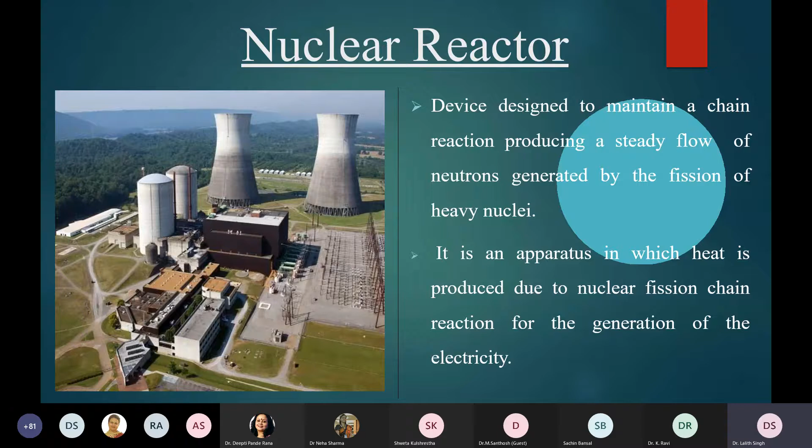And hence our nuclear reactor is designed to maintain this chain reaction so that a steady flow of neutrons can be produced, generated by the fission of heavy nuclei. So in other words, it is an apparatus in which heat is produced due to the nuclear fission chain reaction for the generation of electricity.

Okay. So now let us come to the components of the nuclear reactor, and in this slide we will see what the basic components are and how they work in an integrated fashion for the overall goal of power production. I start with the left hand side of this figure. You are able to see a dome shaped structure, and under this there are some components. There is a rectangular shaped component with round corners, which is known as the reactor core.

In this reactor core the fission reaction takes place, where, as I was saying, so much heat energy gets accumulated, and hence this reactor core has a limitation on what temperature it can sustain. Next, I told you there should be some mechanism to control the population of the neutrons. For this, there are the control rods.

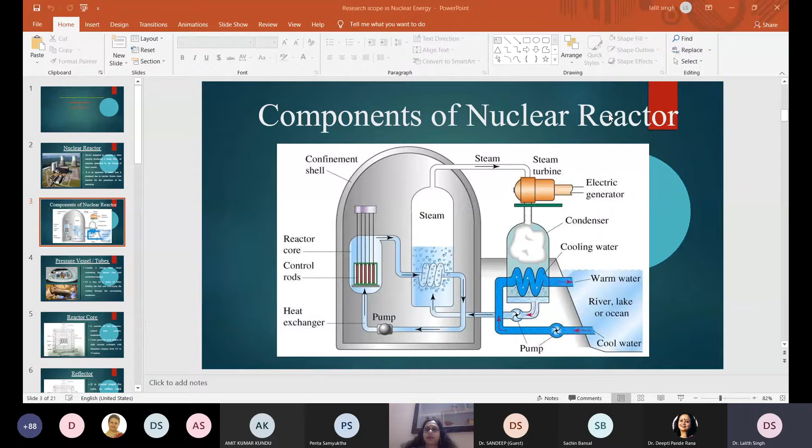I think there might be some technical issue. Yes, sir, you can continue, please. Hello, am I audible? Yes, sir, you can continue, please. Yeah, audible, sir. Somebody might have muted me, I don't know who. Okay, so anyway, I was just talking.

So what happens to this turbine? This steam drives the turbine, but not all the steam can be utilized to drive the turbine. Only the saturated steam is able to drive the turbine, and non-saturated steam comes down to the condenser, which is also shaped like the steam generator, but of lesser height. And in this condenser, what is condensation? When any hot thing touches a cool surface, it suddenly converts into water, the liquid state.

So in the condenser, what happens? The cool water flows in the mechanical pipe which passes through the condenser, and this cool water is taken from the lake or from the sea and pumped into this mechanical pipe. And when this non-saturated steam touches this cool water pipe, it suddenly converts into liquid, and that water can again be pumped into the steam generator, and this way the secondary loop keeps on running throughout the operational period of this reactor.

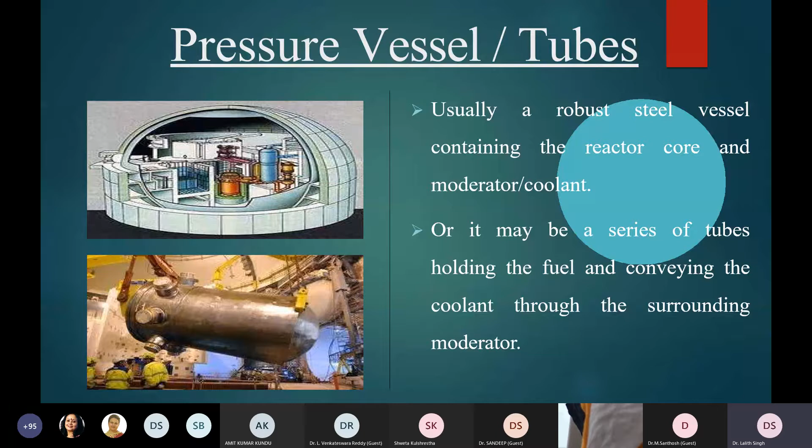As I said, these could also be a series of tubes, where each tube can hold the fuel and convey the coolant through the surrounding moderator, because the moderator is used to thermalize the neutrons. So basically we have to flow the moderator surrounding the fuel where the nuclear reaction is taking place. Now coming to the reactor core, this figure is a close visualization of the reactor core we were discussing.

There are thousands and lakhs of process variables, analog or digital. Analog process variables may include your temperature, flow, or pressure. These are examples of analog variables. Digital variables may include the status of mechanical components, for example valves, heat exchangers and the like.

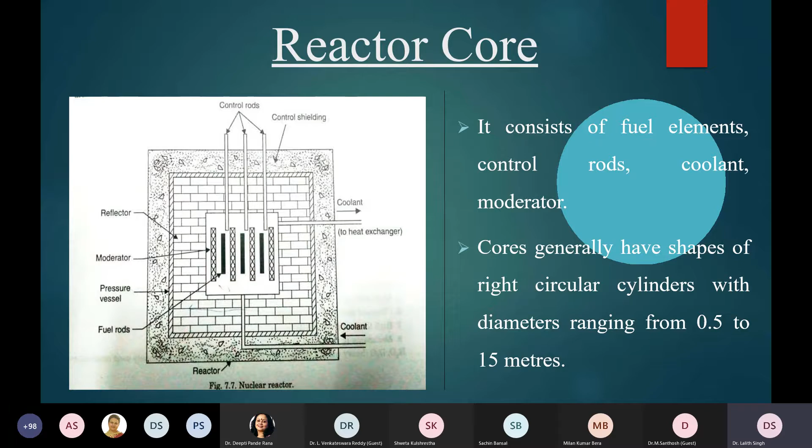So as I said, a reactor core basically consists of fuel elements, control rods, coolant and moderator. And cores generally have the shapes of right circular cylinders with diameter ranging from 0.5 to 15 meters.

Now reflector, we have already talked about what a reflector is. It is basically used to reflect back all the neutrons which were trying to escape from the boundary of the pressure vessel, and it is placed around the core to reflect back all the leaking neutrons. So basically, there's a lot of scope to research on the reflector, what kind of materials can be used as a reflector.

Now coming to the fuel, that's the most basic component of the nuclear reactor.

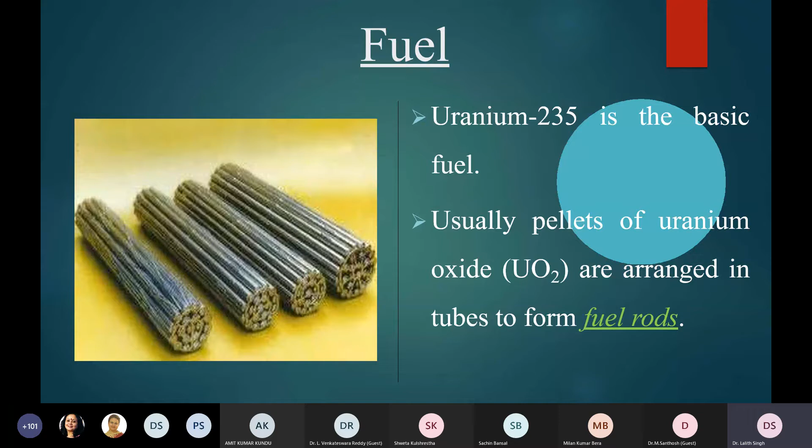So definitely it is a scope of research, because earlier cadmium was used, but it has been seen that cadmium becomes brittle very fast, and hence the life of cadmium is less, for which people started using boron. And in a similar way, it also has many limitations, so we can strive to research to find out some effective material which can be used in the control rod.

So its function is to slow down the rate of the reaction to the controllable limit, otherwise, as I said, the chain reaction blows up like a nuclear bomb. And we can raise or lower the control rods, and it allows operators to control the rate of the nuclear reaction. Although it can be done automatically, depending on the process parameters,

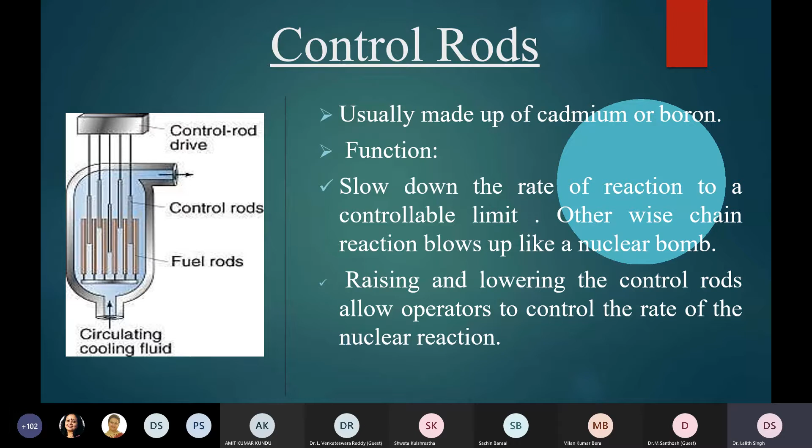the control logics can be simulated, and then as per the control logic, it can be operated by the computer. But definitely there is a facility to override the control logic and drive it manually.

Then coming to the moderator, as I said, moderator is basically to slow down the neutrons from the high velocities.

Sir, Lalit sir, listen. Participants are dropping the message that they are not able to hear you because your voice is very low. Could you please increase your volume? Let me check. It is 100%. Madam, you tell me, are you able to listen to me properly? Sir, it is very low. So should I disconnect and restart? No, no. You speak a little bit louder because your words are not clear. Okay, I'll try. Although I'm speaking very loudly, but still I don't know. You can tell if I stop presenting and I can restart. If it is not audible, then we will decide. Please let me know. Sure, sure, madam.

So coming to the moderator, the function is, as I said, to slow down the neutrons from the high velocities, and hence high energy level which they have on being released from the fission process, so that the probability of the neutron to hit the fuel rods increases.

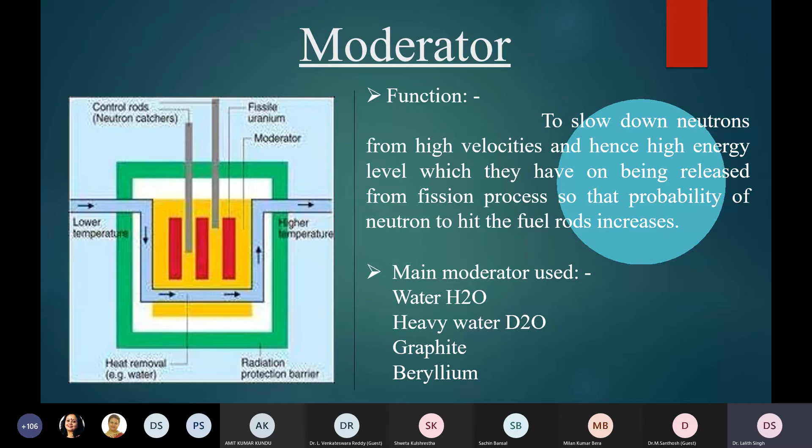Now the coolant, as I told, is used to remove the intense heat produced in the reactor, and that heat can be transferred to water in a separate vessel, which is converted into steam and runs the turbine. And the main coolants that can be used are water, carbon dioxide, mercury, helium.

And yes, this is also a subject of research, how more and more effective coolants can be created or made. So this is the research scope in the area of the coolant.

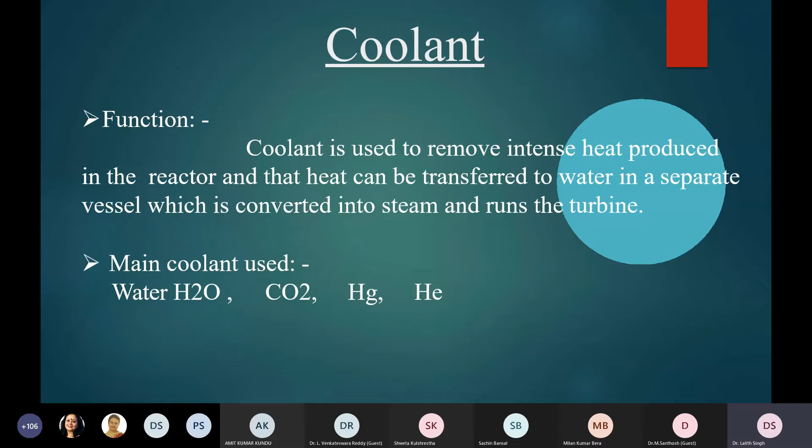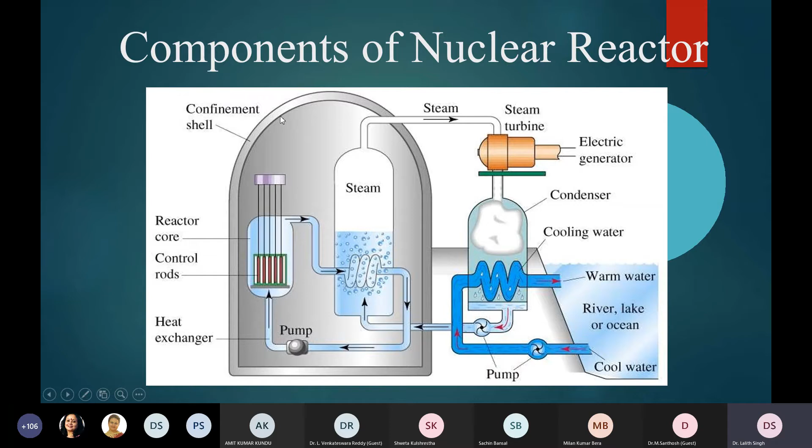Now containment. So containment, as I said, coming back to that first slide, this dome shaped big structure, with the steam generator, reactor core, and pump inside, where the confinement shell is written. Basically, this structure is known as containment, and it requires huge expertise to build the containment.

Because this is the first barrier: if the radioactive release goes out of the containment, it will release to the public. This will be the first interface to the public, and hence it has to be designed to protect it from outside intrusion, and to protect those outside from the effects of radiation in case of any serious malfunctions inside, because inside the components can breach.

For example, there can be leakage into the steam generator, there can be a crack in the pressure vessel, or there can be a loss of coolant accident. And these are the emergency situations which can fail the fuel because of the high temperature, and the fuel can start melting. And that is the reason we have to design the containment so that it can be sustained under all these emergency conditions.

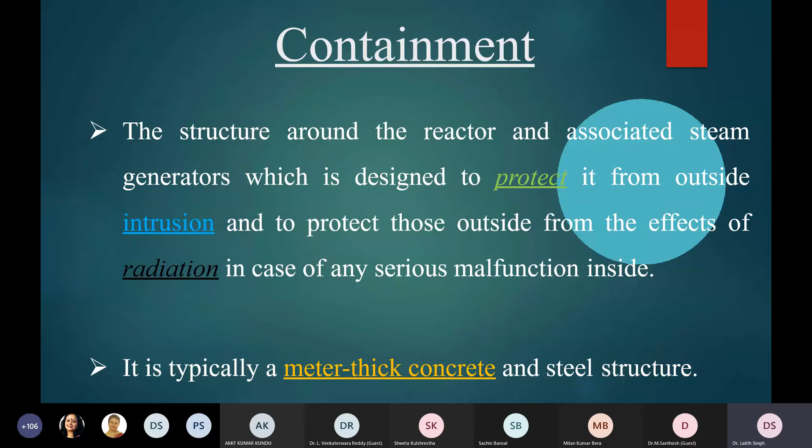And it is typically a 1 meter thick concrete and steel structure. Why steel? Because steel has a good property to reflect the radioactivity, which are the alpha, beta, and gamma radiations. And generally it has two dome shaped structures, one outer and one inner, both almost 1 meter thick, so that if the inner fails, the outer will be able to take it up.

Now let us see some statistics of the nuclear power plants in India. India is planning a huge increase in nuclear power, and it is making nuclear power one of its key policy initiatives, with plans to build 48 new reactors and boost output to 63,000 megawatts by 2032, which is almost a 14 times increase on the current levels. There are existing 20 reactors which are generating almost 4,700 megawatts of electrical energy.

So if you see this India map, the nuclear reactors are in all the parts of India. For example, you can see Rajasthan, and Rajasthan has the biggest capacity, having the large number of nuclear reactors, that are 8 nuclear reactors: one nuclear reactor is of 100 megawatt, one of 200 megawatt, four nuclear reactors are of 220 megawatt each, and two reactors are of 700 megawatt each, where the 700 megawatt reactors are under construction phase, and the rest of the reactors are under operating phase.

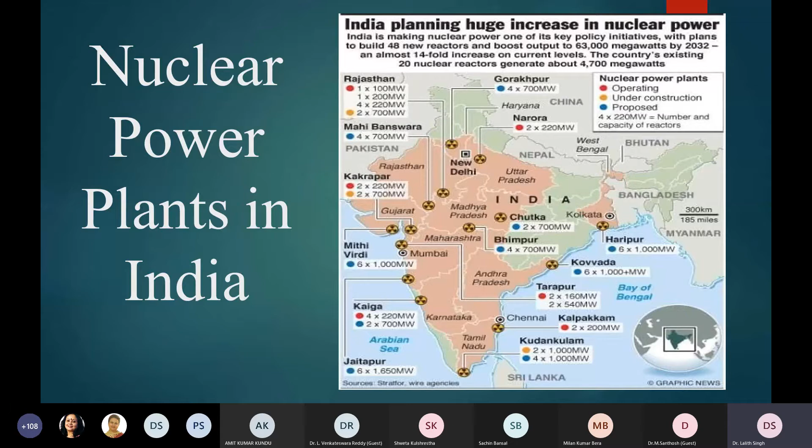Similarly, in Mahi Banswara, there are four 700 megawatt reactors which are under planning phase. So you can see the program is expanding across the country, and 48 new reactors are under the planning phase. Out of them, some are already under construction.

Now you can classify the nuclear reactor based on different parameters. For example, if you want to classify based on the neutron energy, then you can have the fast reactor as well as the thermal reactor. The fast reactors utilize fast neutrons for the chain reaction, and the thermal reactors utilize thermalized neutrons for the chain reaction. So in Kalpakkam, Chennai, the fast breeder reactor is under construction, which is a unique reactor in India, designed and developed indigenously by India itself.

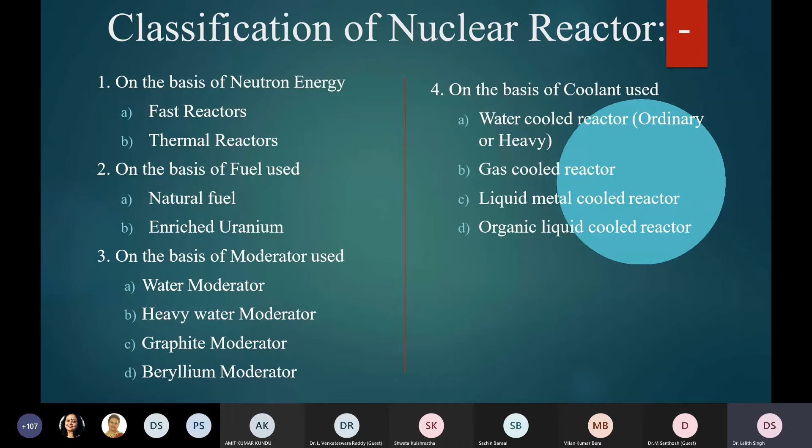Based on the fuel also, we can categorize the nuclear reactor: if your fuel is natural fuel, then it is a natural fuel reactor, or an enriched uranium reactor. Based on the moderator used, you can categorize, for example, water moderated reactor, heavy water moderated reactor, graphite moderated reactor, beryllium moderated reactor. And on the basis of coolant used, for example, water cooled reactor, gas cooled reactor, liquid metal cooled reactor, organic liquid cooled reactor. So these are the classifications of nuclear reactor.

Now let us have a look at the pressurized water reactor, which is one of the types. So you can see this is the containment structure, a dome shaped structure inside which there is a reactor vessel having the inlet and outlet. At the inlet there is cool water which takes out the heat from the reactor vessel, and this heated water goes all the way to the steam generator, which creates the steam, and that steam is transferred to the turbine to operate the turbine, which is coupled with the generator, connected to the grid, and from the grid the electricity can reach the consumers.

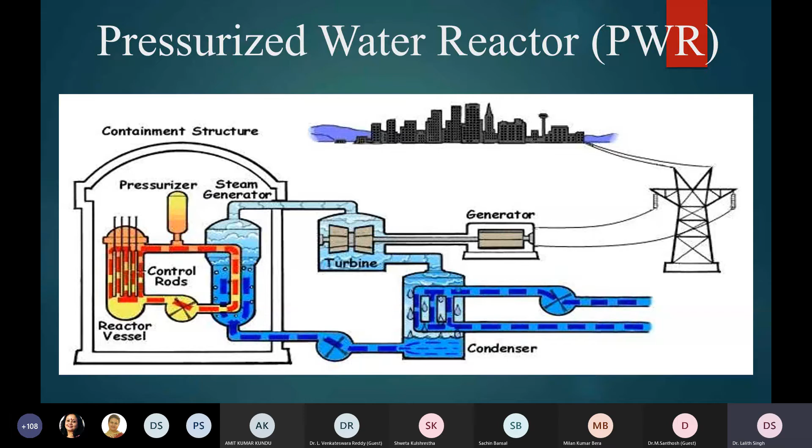And you can see the condenser, which has the tertiary circuit. It is taking the cool water from the lake and transferring the warm water. And one more interesting thing, you can see the pressurizer in the containment structure. If your capacity of reactor is very high, then definitely you have to have the pressurizer to keep pressurizing, because a lot more volume of hot water will be flowing in the pipe, which needs to be maintained at a certain pressure so that the state of that water does not change.

So a lot of economical savings are there, because we can reduce a lot of piping and instrumentation logics, because this steam is directly transferred to the turbine, and we don't need the steam generator, which is very costly also. But there are a lot of issues in this architecture. So first let us see the advantages.

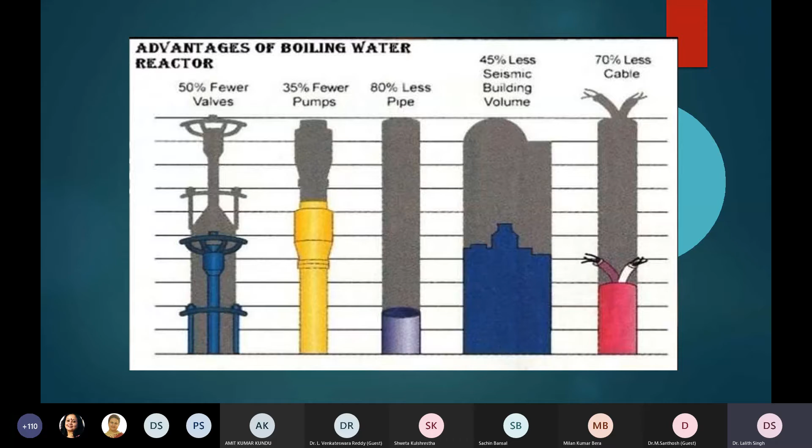As I said, 50% fewer valves are there, 35% fewer pumps are used, 80% less pipes are used, 45% less seismic building volume, 70% less cables are used, and these are huge economical savings, as well as we don't require a steam generator. But disadvantages are also many.

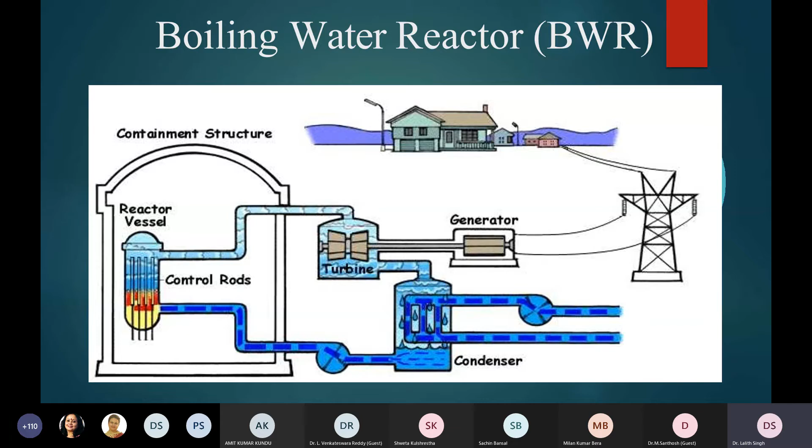There is a possibility of radioactive contamination in the turbine mechanism, because if there is any leakage in this primary circuit, the radioactivity can be directly transferred to the turbine, which is out of this containment structure. It means one level of security has been breached, and hence we have to take extra safety precautions, which can turn out very costly, because safety analysts and reliability analysts may be required.

And moreover, the wasting of the steam is much in this boiling water reactor, resulting in lower thermal efficiency. So only 3 to 5% by mass can be converted to steam per pass.

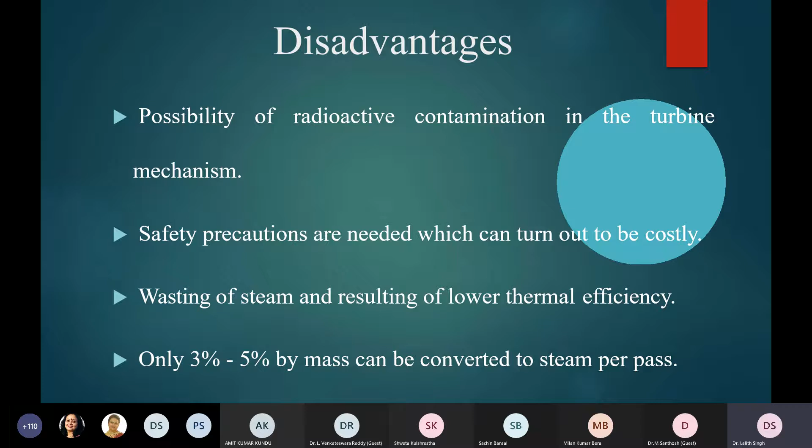In fact, in the embedded systems we cannot use any third party operating system. So we need to design and develop our own operating system. Because of the safety issue, we cannot rely on a third party vendor. So definitely we need to have expertise in operating systems.

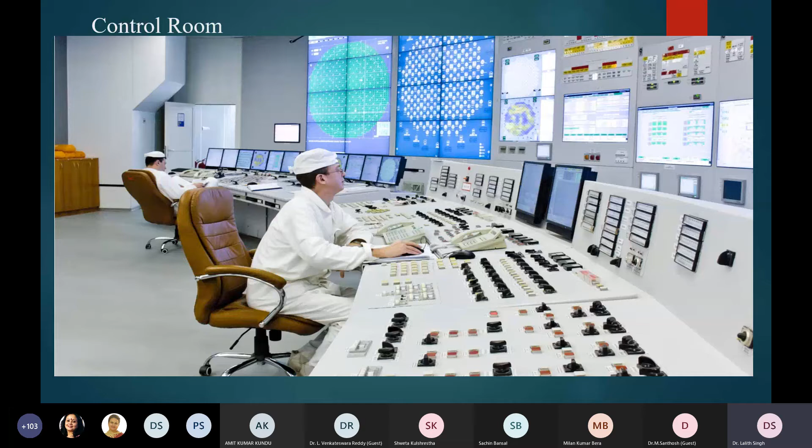It depends on the convenience to the operator, and the size, shape and location need to be fixed as per the international practices, for which several standards are available. In fact, the valves and the alarm windows should have a clear indication.